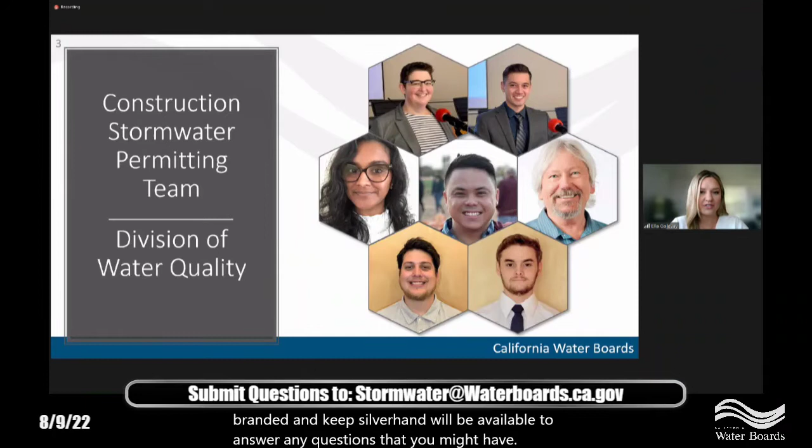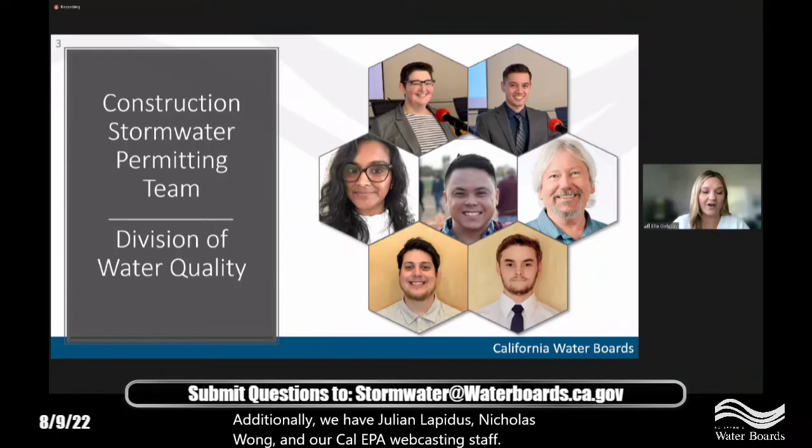As we begin this public workshop, I'd like to introduce our program staff. We have Brandon Roosenboom, who will be presenting information on staff's response to comments and providing an overview of proposed changes in the permit. Following the staff presentation, Brandon and Cabe Silverhain will be available to answer any questions you might have. Behind the scenes, we have Salvador Chaparro and Pushpa Zachariah, running the technical support end and managing Zoom. We have Reed Hashofsky, monitoring the Zoom chat and email for questions. We also have Matthew Shimizu, taking notes and providing support. All of these folks and more have been working diligently on writing the permit, doing necessary technical research, managing and visualizing data, and responding to public comments. Additionally, we have Julian Lapidus, Nicholas Wong, and our Cal EPA webcasting staff who will be assisting with technical functions.

The State Water Board's mission is to preserve, enhance, and restore California's water resources for the benefit of present and future generations, which is why we want to begin this meeting by acknowledging groups who have and who continue to experience economic, environmental, and social disadvantages as a result of historical marginalization and whose daily lives are impacted by racism and injustices. As a reminder, our work here today should strengthen the empowerment of community voices as we collaborate to provide clean, safe, and affordable water to all Californians.

During today's workshop, we will explain the continuing public process for the notice released on July 22nd, 2022. We'll provide a high-level overview of the proposed permit content and identify specific items that changed in response to comment and those that are subject to a limited scope public comment period. We'll answer questions and provide clarification to assist interested parties in understanding the permit requirements.

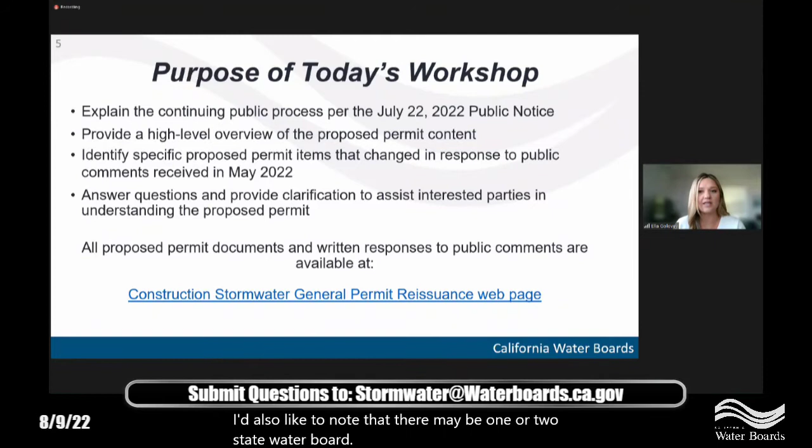Proposed permit documents can be found on our program's webpage. I'd also like to note that there may be one or two State Water Board members in attendance during today's meeting, but there will be no action taken, and this is not a board hearing. This workshop is being webcast and recorded, and it will be posted on the Construction Stormwater General Permit Reissuance webpage, along with the PowerPoint presentation.

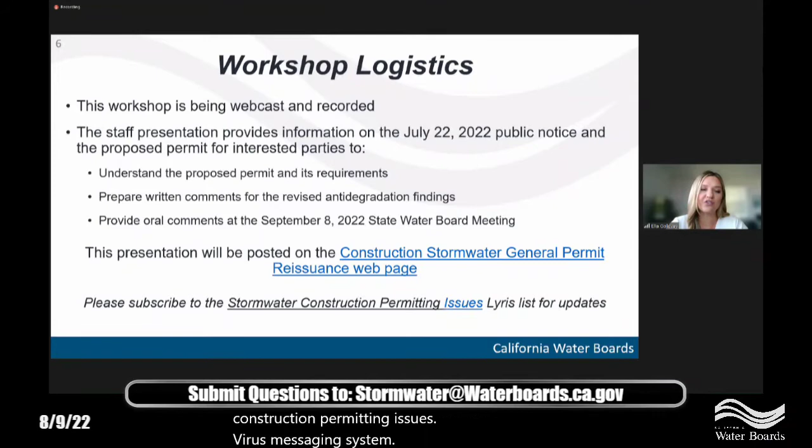Today's presentation will provide information on the July 22nd, 2022 public notice and the proposed permit. This information will help interested parties to better understand the proposed permit and its requirements, prepare written comments for the revised anti-degradation findings, which we will define a little bit later in this presentation, and provide oral comments at the September 8th, 2022 State Water Board meeting. I'd also like to encourage you to subscribe to our Stormwater Construction Permitting Issues Lyris messaging system to receive future notifications and updates regarding the construction general permit.

Following the presentations, we'll take a quick 10-minute break before continuing on to our questions and answers. The workshop will continue until there are no further questions, or about 5 minutes before noon, for some closing remarks. And Ella, I did want to add just a little bit of correction there.

Hopefully this will provide you a good background on the proposed permit requirements and get you all ready for the board hearing in September. So today's workshop will provide an overview of the permit reissuance process, the additional limited scope comment period for the anti-degradation findings, the response to the May 2022 limited scope comments, and a general review of proposed permit requirements.

So first up, permitting background and process. We'll begin this presentation with some construction stormwater permitting context. The Federal Clean Water Act prohibits certain discharges of stormwater to waters of the United States, except for those with a National Pollutant Discharge Elimination System, or NPDES, permit.

The Construction Stormwater General Permit is a specific NPDES permit that regulates discharges of runoff generated by precipitation over a construction site or other areas of active land disturbance. The State Water Resources Control Board adopted the existing NPDES Construction Stormwater General Permit in 2009 to regulate stormwater discharges associated with construction activities that disturb 1 or more acres of land.

The 2009 Construction General Permit expired in September of 2014 and has been administratively extended until the effective date of a reissued Construction Stormwater General Permit. The proposed permit serves to implement regulatory requirements such as federal effluent limitation guidelines, statewide policies, and total maximum daily loads that became effective since the adoption of the 2009 permit.

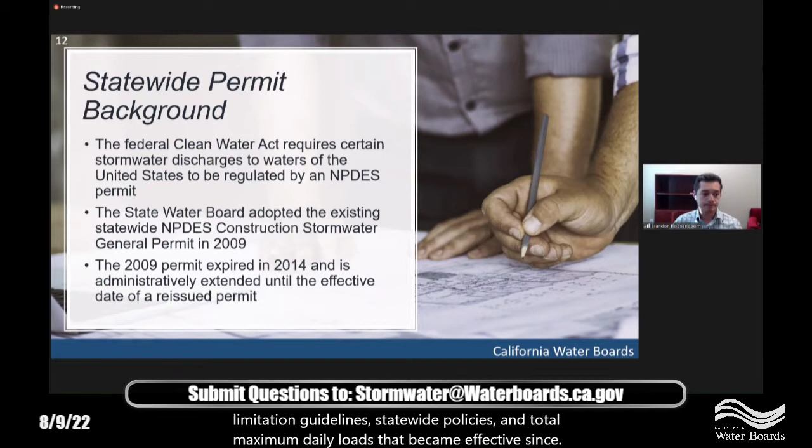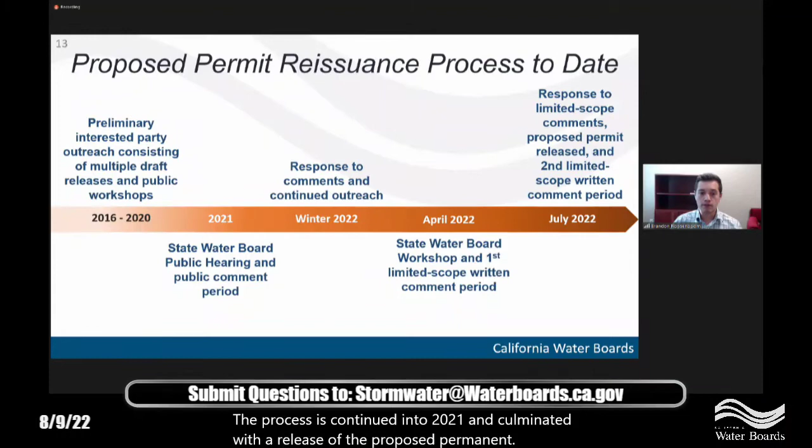This permit reissuance has been in the works for quite some time, since before my time with the water boards, in fact starting in 2016, where staff have been engaging with interested parties and releasing multiple drafts throughout this time period to refine the requirements of the proposed permit. The process has continued into 2021 and culminated with a release of the proposed permit reissuance in July of 2022 for the consideration of its adoption in September.

Looking forward, we have several key dates to be aware of. Written comments for the second limited scope public comment period will be accepted until noon of August 23rd, 2022. For those looking to submit a PowerPoint presentation for the board's adoption meeting, those will be due at noon on September 1st, 2022. And of course, the board meeting to consider adoption of the proposed permit is September 8th, 2022.

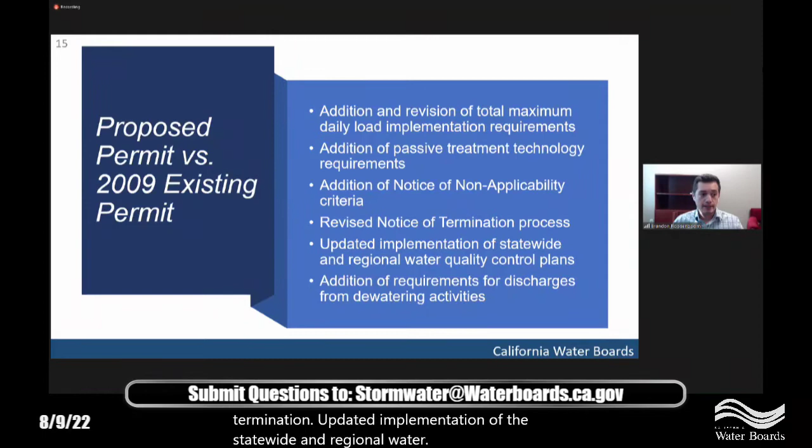So, what are the primary differences between the proposed permit and the 2009 existing permit? Well, those include the addition and revision of total maximum daily load implementation requirements, the addition of passive treatment technology requirements, the addition of notice of non-applicability criteria, a revised process for the notice of termination, updated implementation of the statewide and regional water quality control plans, and the addition of requirements for discharges from dewatering activities.

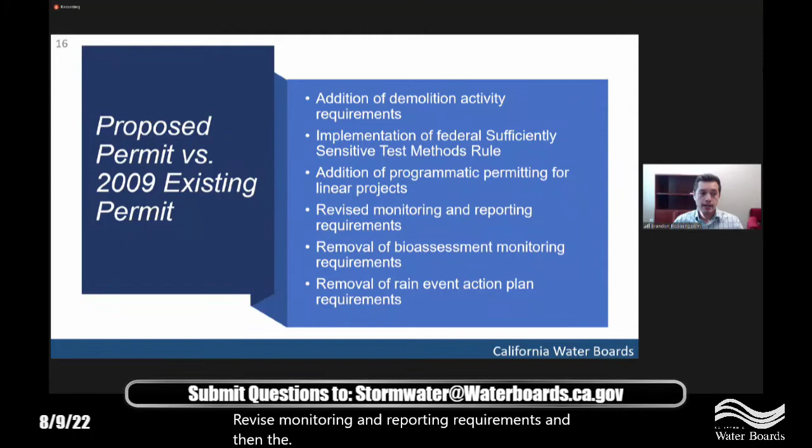Continuing on, other differences include the addition of some demolition activity requirements, the implementation of the federal sufficiently sensitive test methods rule, addition of programmatic permitting for linear projects, revised monitoring and reporting requirements, and then the removal of bioassessment monitoring and rain event action plans.

So next we'll be discussing the item that the additional limited scope comment period focused on, the revised anti-degradation findings. During the first limited scope comment period, the State Water Board received comments on the proposed anti-degradation findings in the March 2022 draft of the permit reissuance. The revised anti-degradation findings are set forth in section IH2 of the fact sheet.

Consistent with the anti-degradation provisions of 40 Code of Federal Regulations 131.12 and State Water Board Resolution 68-16, the fact sheet includes findings for water bodies that do not meet water quality objectives and water bodies that exceed water quality objectives, which the findings refer to as high quality water bodies. The fact sheet explains that no anti-degradation findings are required for water bodies that meet but do not exceed the water quality objective for a particular pollutant.

As the fact sheet explains, for ease of analysis, the findings use 1968 as the baseline water quality. Because the permit enrollment is available statewide, the State Water Board assumes that there will be discharges to both high quality waters and non-high quality waters.

For water bodies that do not meet water quality objectives, the permit is consistent with the anti-degradation policies because the permit will ensure that existing uses are maintained and protected. Discharges authorized by this permit would not cause further degradation, nor would they interfere with the improvement of water quality of such waters.

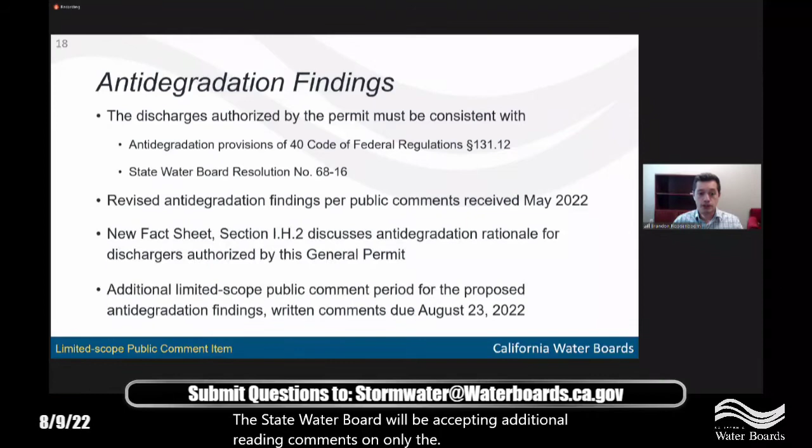For high quality waters, the findings apply decision-making criteria set forth in the anti-degradation policies. The fact sheet was revised to include additional detail and provide some extra evidence supporting the State Water Board's analysis of regulatory alternatives. The State Water Board will be accepting additional written comments on only the revised anti-degradation findings, and those are due at noon on August 23rd, 2022.

In addition to the revised anti-degradation findings, staff prepared responses to comments on 3 other items from the May 2022 limited scope public comment period: the regulatory transition period, the retranslation of nitrogen-based numeric effluent limitations, and the TMDL related soil screening investigation and its associated total suspended solids numeric effluent limitation. We will start by discussing the proposed permit effective date and the associated regulatory transition period, but save the TMDL related limited scope comments for the TMDL implementation requirements section of the presentation.

So, proposed effective date. Staff is proposing an effective date of September 1st, 2023 for the construction stormwater general permit reissuance. This is roughly a year after the scheduled board meeting to consider adoption of the permit. This date was selected to allow ample time for State Water Board staff to enhance SMARTS to accommodate electronic submittals, and provide the regulated community and stormwater professionals with roughly a year to prepare for new permit requirements, if the anticipated reissuance timeline holds.

Additionally, the regulated community requested that the effective date be set during the drier period of year. And although we've been getting a little bit of rain this summer, September is generally still a drier part of a California year.

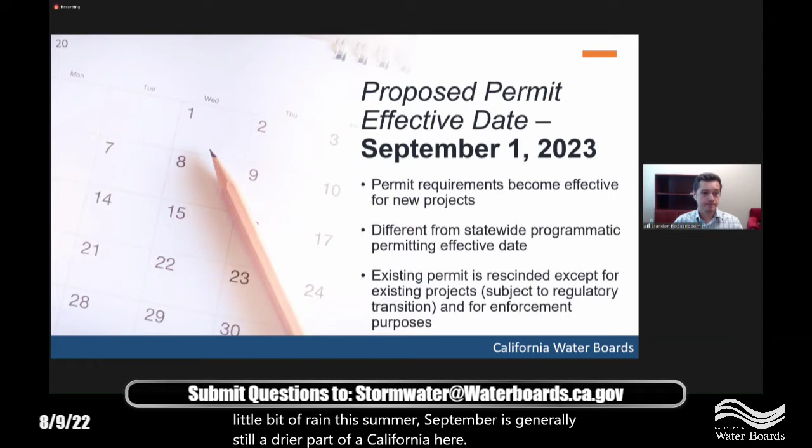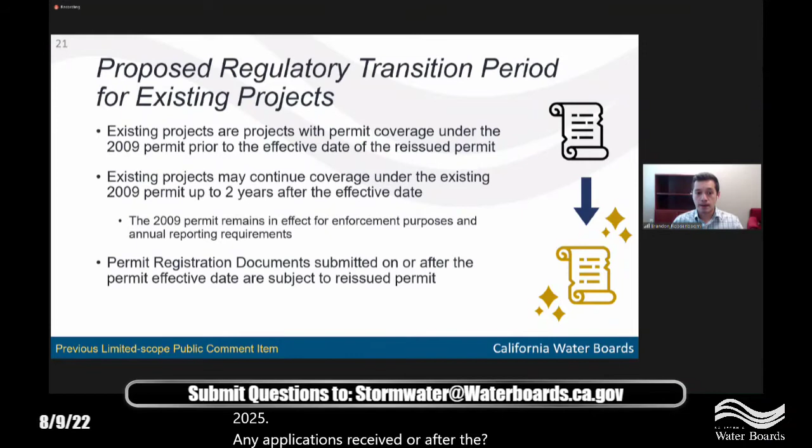The proposed permit released in July 2022 continues to offer existing dischargers a regulatory transition period, with one key difference from the previous draft: the transition period has been shortened from 3 years to 2 years after the effective date of the reissued permit. Thus, permittees that enroll under the 2009 general permit prior to the effective date of the permit may continue coverage under the 2009 permit until August 31st, 2025. Any applications received on or after the effective date of the reissued permit must comply with the reissued permit's requirements.

Okay, the next section is to provide a high-level overview of the major differences between the existing and proposed permits, starting with some of the more administrative changes.

The reissued permit allows dischargers to submit what's called a Notice of Non-Applicability, or NONA, when a construction site is not hydrologically connected to waters of the United States. This is demonstrated through a no discharge technical report, which must be prepared by a California licensed professional engineer or professional geologist with hydrological expertise. Regional Water Board staff may review the no discharge technical report and require that the discharger reassess NONA eligibility if it is determined that there are errors in the report, or if the site is indeed hydrologically connected to waters of the United States.

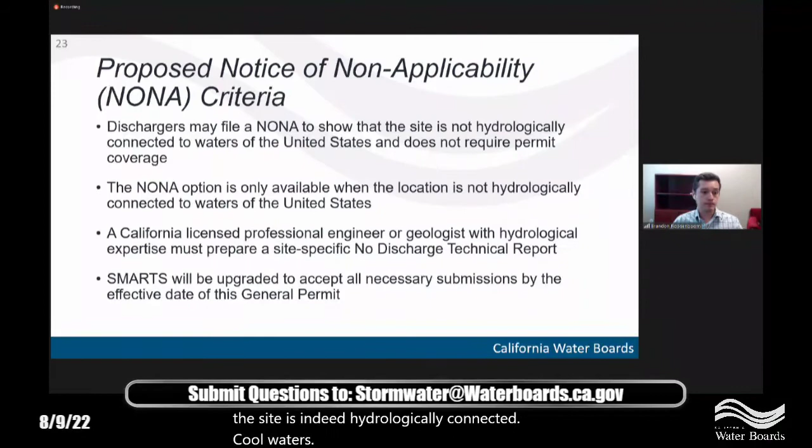Another administrative change is the proposal to include programmatic permitting for linear projects. Programmatic permitting allows linear underground and overhead project dischargers to submit a single notice of intent to obtain coverage for multiple non-contiguous linear underground overhead projects if they are located within one regional water board, consist of similar scope of activities, and have the same legally responsible person. Programmatic permitting can be used for all linear project types.

Staff added a provision in the July 2022 draft for dischargers deploying Executive Order N-73-20 to obtain statewide programmatic permit coverage within 100 days of the reissued permit's adoption date, to facilitate meeting the executive order's deadline to provide high-speed broadband internet access to California's rural communities. This only applies to broadband projects that are outside of a construction project otherwise regulated by this permit. The proposed effective date of the statewide programmatic permitting option would be December 17th, 2022, if the permit is adopted on September 8th, 2022.

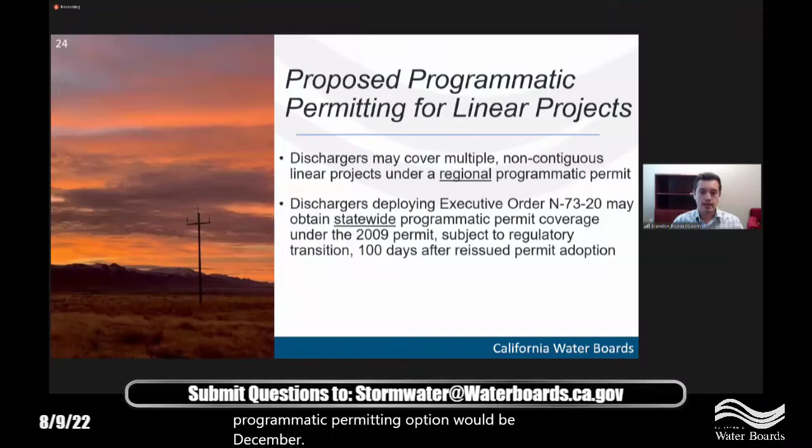The proposed permit incorporates a provision for dischargers, primarily large housing developers, to terminate residential lots that have unfinished yards and landscaping areas, in order to reduce the acreage. The dischargers must meet the following criteria: the residential lots have been sold to individual homeowners for residential use, and a certificate of occupancy or equivalent document is maintained on the site. The lot must be less than 1 acre of disturbance, and all construction activity conducted on the lot by the discharger has to be complete, and the discharger has to install temporary best management practices to stabilize the unfinished yards or landscaping areas.

The discharger shall upload as an attachment to SMARTS documentation of a contract, such as covenants, conditions, and restrictions, requiring that the individual homeowner stabilize the yard and landscaping within 1 year and maintain temporary best management practices until stabilization is achieved.

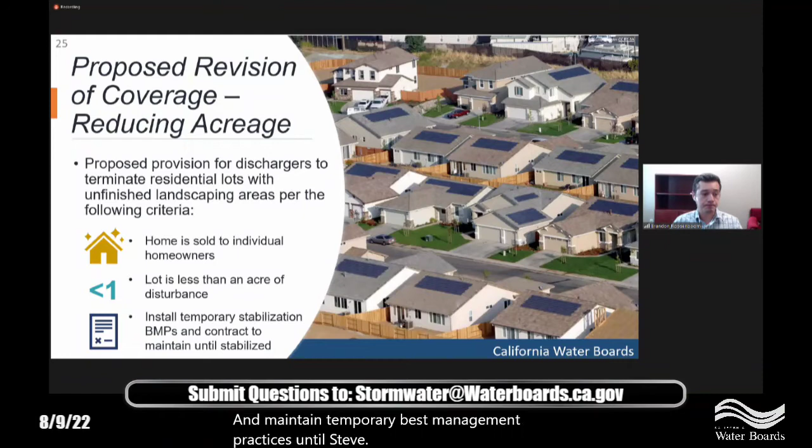The proposed permit also allows a discharger to reduce monitoring when all construction activities are suspended at the project and the site is temporarily stabilized or buttoned up. The discharger is required to revise the stormwater pollution prevention plan in SMARTS through a change of information and must provide a revised site map as well as photo documentation of the temporary stabilization.

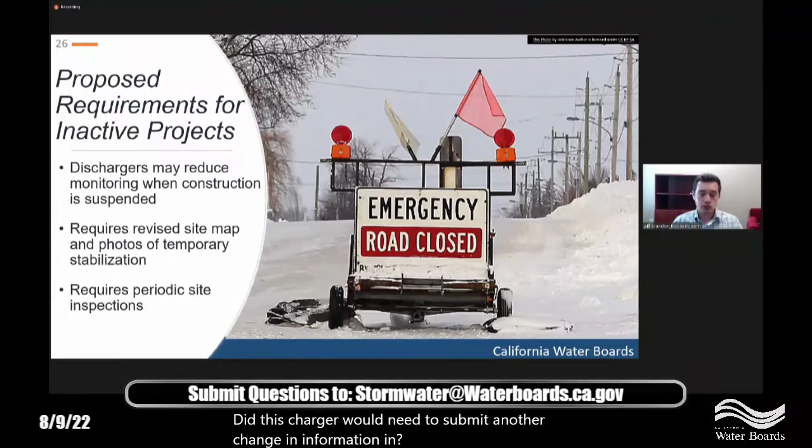That said, this still requires periodic inspections. Once by the qualified stormwater pollution prevention plan practitioner within 14 days of the approved change of information to switch to an inactive status, and then once monthly and also prior to qualifying precipitation events, and those can be done by either the qualified SWPPP practitioner or their delegate. The discharger would need to submit another change of information and updated SWPPP in order to resume construction activities.

The proposed permit reissuance notice of termination process has a few additional requirements compared to the 2009 permit. The notice of termination process now requires that the qualified SWPPP practitioner conduct a final inspection to ensure that the permanent best management practices are functioning as intended, and that the site meets final stabilization conditions. The discharger is now required to submit photos and a final site map with the notice of termination as well. And as with the previous permit, a brief long-term maintenance plan is required to show that the post-construction best management practices and any low-impact development will be maintained to continue functioning as intended to protect water quality.

This additional information, if prepared properly, should facilitate the regional water board staff's effort to approve or return notices of termination within a timely manner. And as we've heard from dischargers over the implementation of the existing permit, this process can take long.

The proposed permit reissuance also includes a provision that automatically approves notices of termination if the regional water board does not take any action on that notice of termination within 30 days. And those actions could be accepting the notice of termination for review, denying the notice of termination, or returning the notice of termination with some comments.

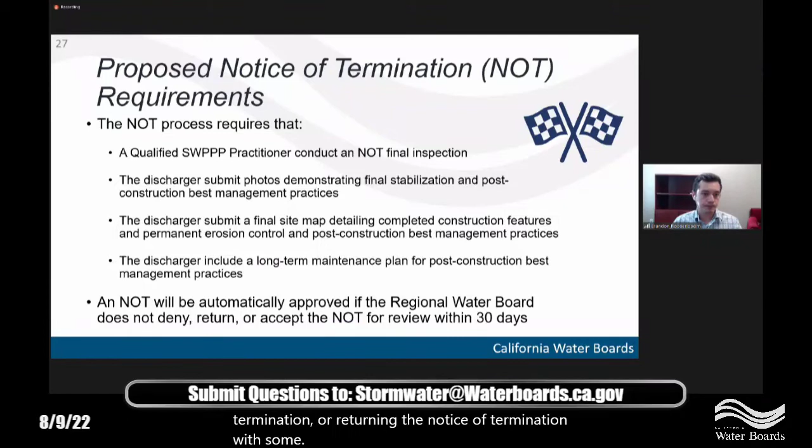All right. Getting away from those more administrative changes, we'll be going into some of the monitoring and reporting requirements.

The proposed permit identifies clear roles and responsibilities for qualified stormwater pollution prevention plan developers and practitioners, otherwise known as QSDs and QSPs. One of the objectives of the reissued permit is to require that a QSD spend a little more time observing site conditions each year, as well as increase communication with their qualified SWPPP practitioners when there is an issue with the discharger's water quality.

Additionally, throughout the implementation of the existing 2009 permit, many stormwater professionals, regulators, and members of the regulated community have witnessed poor performing QSDs and QSPs. The proposed permit now allows the water boards to suspend or rescind QSD, QSP certifications as an enforcement action should we receive a complaint about a particular QSD or QSP's work.

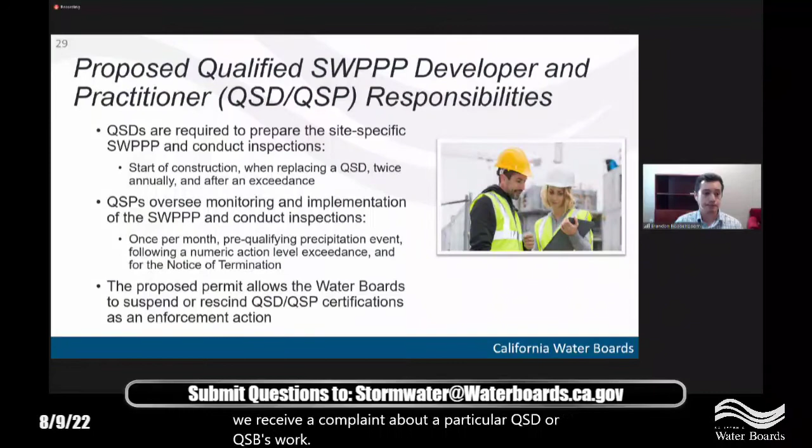Qualified SWPPP developers and practitioners certified through CASQA must take 6 hours of continuing education annually to remain in good standing with their certification. Staff agreed that continuing education is important, especially considering how best management practices are constantly evolving in the industry.

In order to broaden the number of pathways for aspiring QSDs and QSPs to obtain their certification, any individual may recommend a course for the Deputy Director of the Division of Water Quality to consider as a prerequisite for the Qualified SWPPP Developer and Qualified SWPPP Practitioner roles. State Water Board staff and the Construction General Permit Training Team will review those recommendations and advise the Deputy Director's decision whether or not to consider one of those as a prerequisite course.

Qualified SWPPP practitioners opting to delegate responsibilities to other individuals are required to provide training to those individuals based on the guidelines that the Construction General Permit Training Team prepared. The proposed permit includes foundational training courses such as roles and responsibilities of stormwater professionals, forecasting information, and reporting, as well as site-specific training for visual inspection, sampling procedures, and the implementation of the stormwater pollution prevention plan and best management practices relevant to that delegate's assigned responsibilities. Staff find that this requirement is necessary to ensure that delegates are properly implementing stormwater management practices in order to comply with the permit.

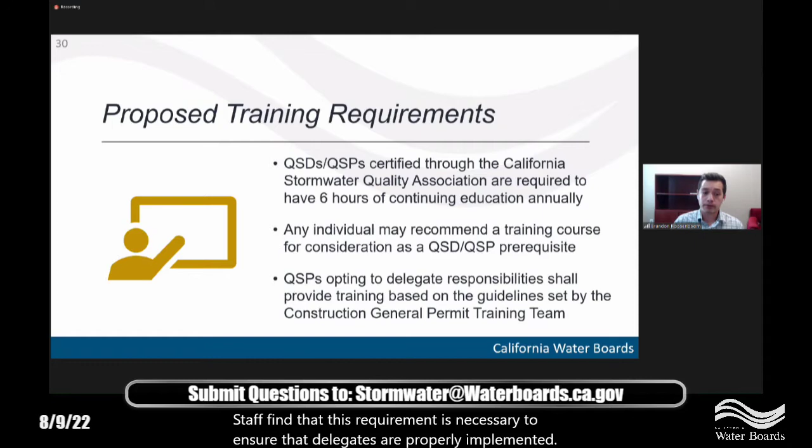The proposed permit switches from precipitation accumulations to precipitation forecasts, giving dischargers more time to plan for their monitoring activities. Advancements in forecasting capabilities since 2009 have supported this change. A qualifying precipitation event is now initiated by a forecasted precipitation event of half an inch or more precipitation in a 24-hour period. The qualifying precipitation event continues for each subsequent 24-hour period with a quarter inch of forecasted precipitation or more, and it would end with two consecutive 24-hour periods with less than a quarter inch forecasted.

The post-qualifying precipitation event inspection may be done on either the day where there is less than a quarter inch predicted, or 48 hours after the event ends.

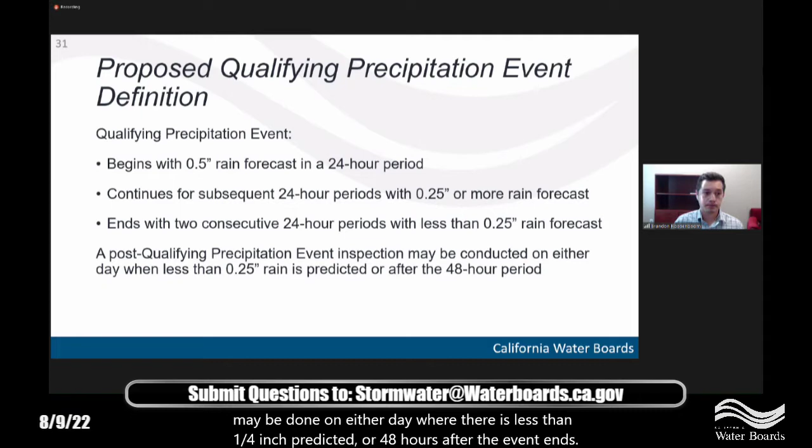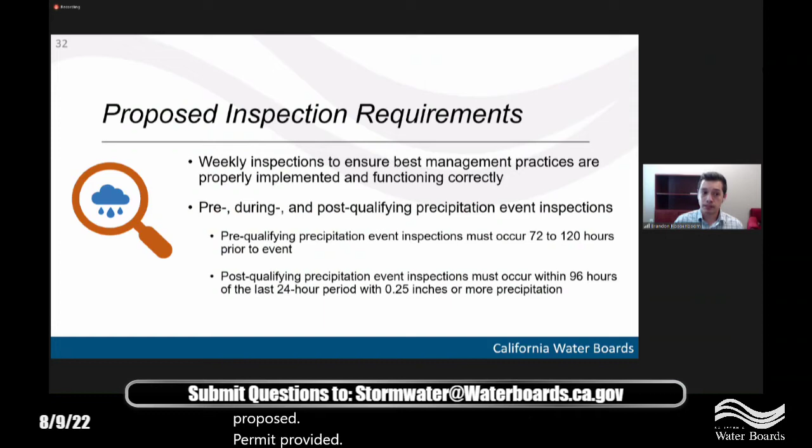All dischargers, regardless of their risk level or type, are required to conduct weekly visual inspections as a means to check up on best management practice implementation. As with the existing 2009 permit, dischargers are required to conduct pre, during, and post-qualifying precipitation event inspections. However, the proposed permit provides greater ranges and thus flexibility for when those inspections can occur.

This graphic summarizes the qualifying precipitation event inspection process. When the National Weather Service predicts an upcoming 24-hour period of half an inch or more precipitation, the inspector must complete a pre-qualifying precipitation event inspection anytime from 72 to 120 hours prior to the onset of the storm. Once the storm begins, an inspection is required during working hours within the initial 24-hour period of precipitation.

If the forecast was revised to less than half an inch before the event begins, an inspection must still be done if a quarter inch or more is forecasted. During qualifying precipitation event inspections are required for each subsequent 24-hour period when a quarter inch or more is forecasted, but not required during 24-hour intervals if less than a quarter inch is predicted.

The qualifying precipitation event ends when there are two consecutive 24-hour periods where there is less than a quarter inch forecasted. The post-qualifying precipitation event inspection may be done during either of those two periods, as I mentioned before, or within the subsequent 48-hour period.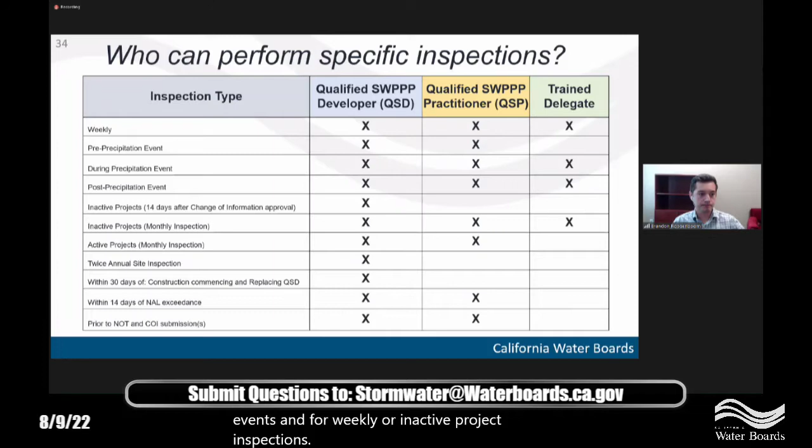Next, we will move on to more of the sample-based monitoring requirements. As a reminder, risk level 1 dischargers are not required to collect stormwater discharge samples, and that has not changed between the existing and proposed permits. That said, risk level 2 and 3 dischargers are still required to collect samples for comparison against the pH and turbidity numeric action levels established by the permit.

However, a key difference is that dischargers are now only required to collect one sample per discharge location per day of discharge, and the numeric action levels are assessed on a per discharge location basis rather than on a daily site average. Thus, staff expects dischargers to collect fewer samples overall, but they may be required to perform corrective actions for more specific site drainages.

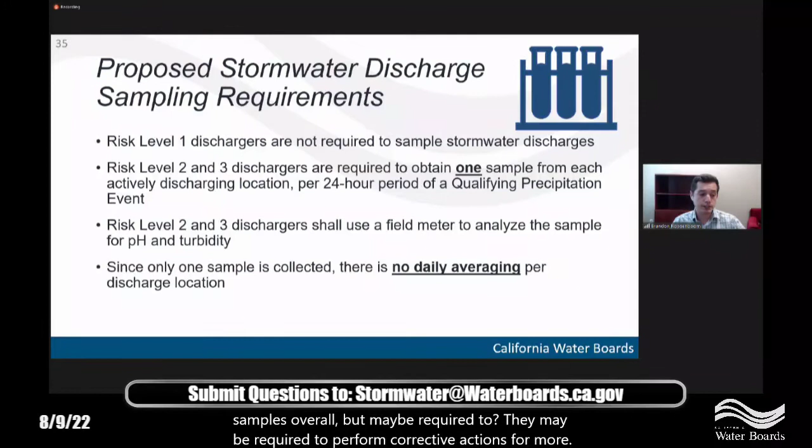This figure represents a 24-hour period divided into 4 6-hour quarters to demonstrate when qualifying precipitation event sampling could be done, and would be repeated each day where there is discharge during an extended qualifying precipitation event. I have gone over this before in previous workshops, and I think it's fairly self-explanatory, so we'll go ahead and save some time there by continuing on.

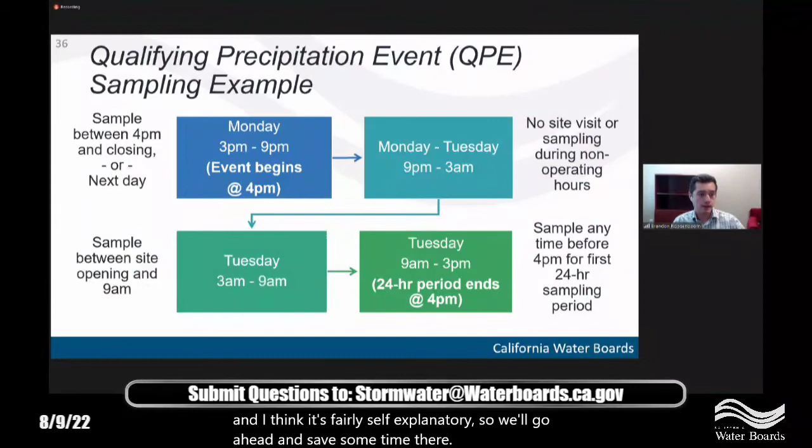One of the other key monitoring requirements that the proposed permit relies on is non-visible pollutant monitoring, which was also required by the existing 2009 permit. Non-visible pollutant monitoring is required when any discharge has the potential to discharge a pollutant that was identified or should have been identified in the project's pollutant source assessment due to one of the following reasons.

And that is a failure to implement best management practices, a container spill or leak, or a best management practice breach, failure, or malfunction. Dischargers are required to collect a non-visible pollutant sample every 24-hour period of discharge until necessary corrective actions are completed. And they do not have to sample if the pollutant is cleaned up or corrective actions are implemented prior to discharge.

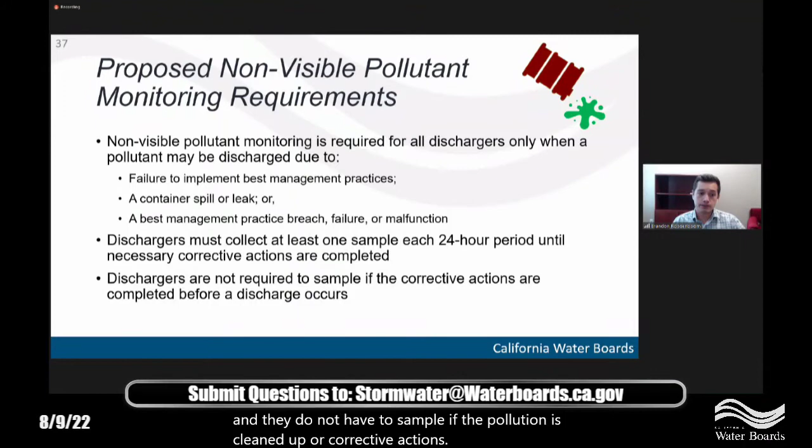The next section likely represents the most significant change between the existing 2009 permit and the proposed permit, and that would be the proposed total maximum daily load implementation requirements.

Total maximum daily loads are existing regulations that are incorporated into Regional Water Quality Control Board water quality control plans through separate public adoption processes. Total maximum daily loads address pollutants that cause impairments to water bodies by establishing a sum of allowable pollutant loading into a specific water body or watershed from all identified sources of that pollutant. Total maximum daily loads are not self-implementing and are implemented through the requirements adopted in NPDES permits or other board actions, such as the construction stormwater general permit.

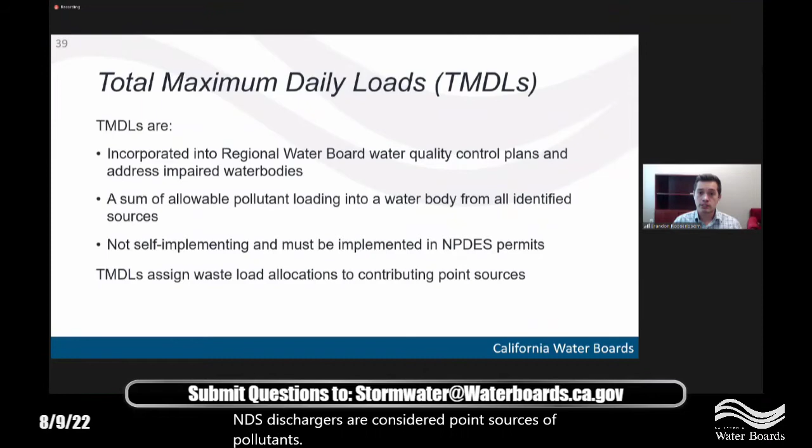NPDES dischargers are considered point sources of pollutants and are assigned what is called a waste load allocation to limit the discharge of pollutants.

Due to the variety of pollutants and waste load allocations assigned to address them, staff have developed multiple implementation strategies consistent with the assumptions and requirements of the total maximum daily loads. The intent was to streamline compliance by leveraging and modifying existing permit requirements where possible. Existing requirements in the 2009 permits, such as pollutant source assessments, source control best management practices, soil loss modeling via RUSLE2, and non-visible monitoring and other reporting are the basis for the total maximum daily load implementation requirements.

There are four main categories of total maximum daily load implementation requirements. The first is compliance with the general permit, where those requirements are already sufficient to comply with the total maximum daily load. All four categories must comply with the general permit requirements.

The second would be compliance with erosion and sediment controls in the permit, paired with the revised universal soil loss equation model, to demonstrate compliance with the mass-based waste allocations, which are typically assigned for sediment and sediment-associated pollutants.

Compliance with the total maximum daily load related numeric action levels is the third category, and that's to comply with concentration-based waste allocations assigned in the receiving waters. And lastly, compliance with total maximum daily load related numeric effluent limitations to comply with concentration-based waste allocations assigned at the point of discharge. However, as we will discuss in a few moments, some numeric effluent limitations were retranslated through the iterations of the proposed permit process.

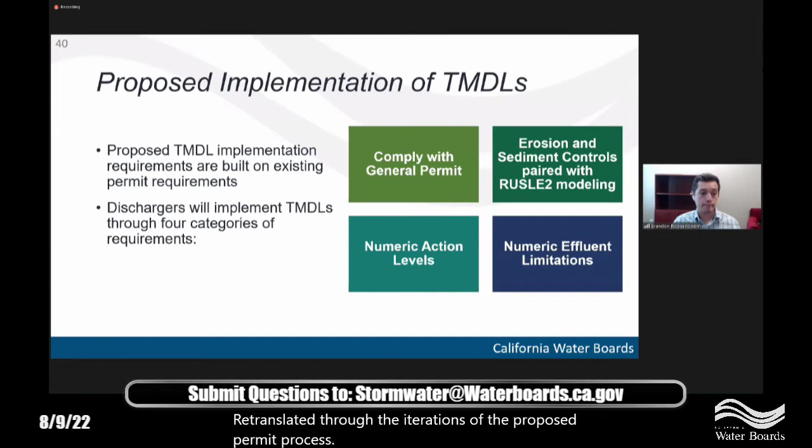So how will construction stormwater dischargers know which proposed total maximum daily load implementation requirements apply to them? Well, there are three main steps. Step one would be to determine responsible discharger status.

Does this project discharge into a total maximum daily load watershed or water body? Is the main question to answer here. The State Water Resource Control Board plans on providing a map tool to guide dischargers similar to the existing guidance for the industrial stormwater general permit, which is shown to the right. However, it is the discharger's responsibility to verify if the project's discharges actually go to a TMDL watershed or water body. The second step would be to perform a site-specific pollutant source assessment.

Does this site have sources of the total maximum daily load listed pollutants? And is there potential for those pollutants to be present in stormwater discharges? If not, the total maximum daily load implementation requirements are not applicable to the discharge. Lastly, the discharger would refer to the proposed attachment H for any of the applicable total maximum daily load implementation requirements to determine which ones they must comply with.

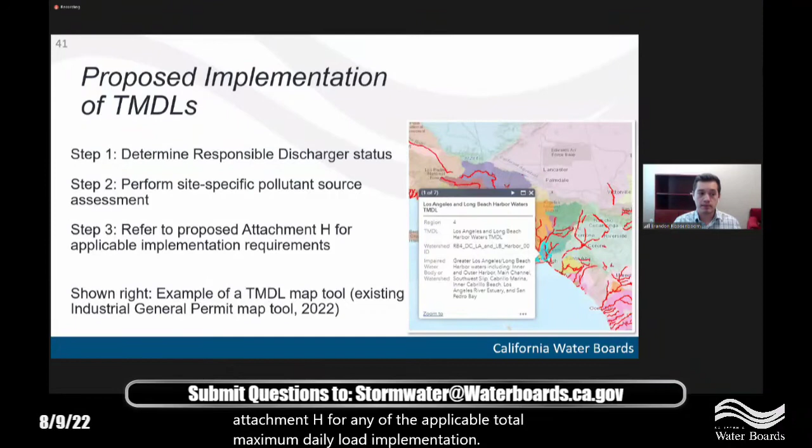In the event that the discharger has to comply with a total maximum daily load related numeric action level or numeric effluent limitation, the discharger would assess their discharges through non-visible pollutant monitoring. All three of the following conditions need to be met in order to trigger total maximum daily load sampling. If any condition is not met, then sampling is not required by the discharger.

First, the construction project must discharge to a TMDL listed watershed or water body. Second, the pollutant source assessment must identify a TMDL specific pollutant with a waste load allocation translated into either a numeric action level or numeric effluent limitation, and that has to have the potential to discharge into the listed TMDL watershed or water body. And then third, non-visible pollutant sampling must be triggered.

Non-visible pollutant sampling is triggered when there is a failure to implement best management practices, there is a container spill or leak, or there's a best management practice that has been breached, failed, or is malfunctioning. If the spill, leak, or breach is not fixed and cleaned and best management practices are not implemented prior to discharge, then non-visible pollutant sampling will be required. However, if the spill, leak, or breach is immediately cleaned and best management practices to control the pollutants are implemented prior to discharge, then non-visible pollutant sampling is not required.

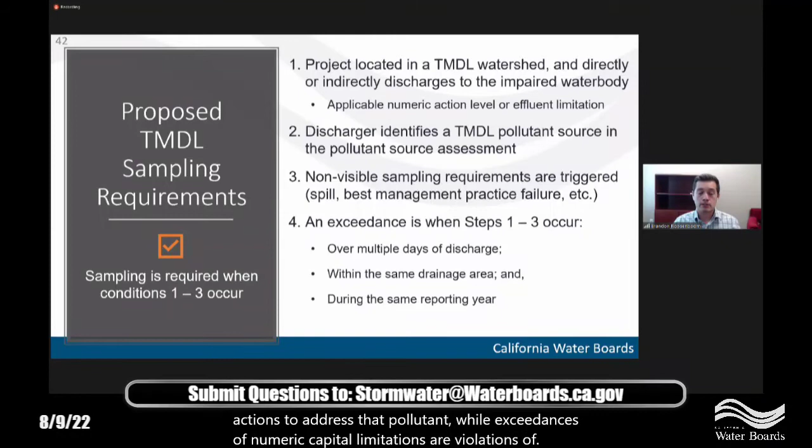Now that we've covered the basics of the proposed total maximum daily load implementation requirements, we can move on to our discussion regarding the May 2022 limited scope TMDL related items.

The first of these two limited public scope comment items is the retranslation of nitrogen-based nutrients from numeric effluent limitations into numeric action levels. Throughout the reissuance process, staff has heard on multiple occasions that numeric effluent limitations, especially for nitrogen-based nutrients, are infeasible to comply with using standard construction best management practices. On the other hand, staff has also heard support for the numeric effluent limitations, as commenters claimed that this is how the total maximum daily loads were intended to be interpreted and implemented through NPDES permits.

The proposed permit maintains the retranslation into numeric action levels, as staff has revised the fact sheet to further explain how numeric action levels are actually consistent with the assumptions and requirements of the total maximum daily load waste allocations, and they are expected to be protective of water quality. Additionally, available data from industrial stormwater dischargers supports the expectation that most construction stormwater dischargers will be able to comply with the numeric action levels.

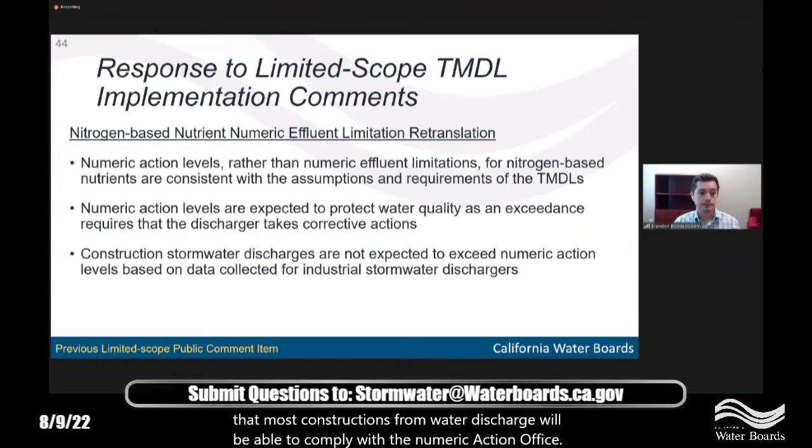The second TMDL-related limited scope public comment item was the proposal of a TMDL-related soil screening investigation and associated total suspended solids numeric effluent limitation for very specific waste allocations that address metals, organochlorine pesticides, and PCBs. These proposed TMDL implementation requirements would only apply to dischargers discharging into a water body or watershed addressed by the Los Angeles Area Lakes TMDL and the Los Angeles and Long Beach Harbor Waters TMDL. The discharger would conduct a soil screening investigation across the site to collect random samples according to a procedure outlined in the permit and analyze them for the applicable total maximum daily load pollutant.

If the results do not indicate that metals are present at concentrations above their waste allocations, or that organochlorine pesticides and PCBs are present at concentrations above the reporting limit of the method used to analyze the soil, then the discharger is not required to comply with total maximum daily load implementation requirements. If the pollutants are found to be present, the discharger is required to comply with a numeric effluent limitation for total suspended solids set at 100 milligrams per liter. This numeric effluent limitation would be assessed at the same frequency as other TMDL-related numeric action levels or effluent limitations, through the non-visible pollutant monitoring we just discussed.

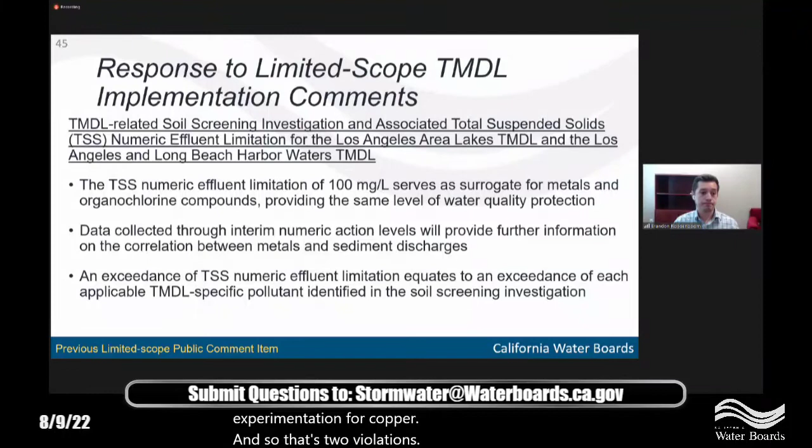Okay, and then we'll briefly discuss some other proposed requirements to save on time. The proposed permit also includes requirements for surface water buffers, essentially requiring that dischargers provide a 50-foot buffer where feasible. But dischargers also have the option of implementing best management practices that provide equivalent protection to a 50-foot buffer, which would be demonstrated using soil loss modeling.

There are also some proposed requirements for active treatment systems. Under the proposed permit, dischargers are allowed to bypass active treatment systems if their discharge complies with the discharge prohibitions and numeric action levels of the permit. Additionally, the proposed permit reestablishes the 10-year, 24-hour compliance precipitation event following comments received during the April board workshop. This compliance precipitation event provides dischargers with an exemption to the technology-based active treatment numeric effluent limitations.

The proposed permit also contains proposed requirements for passive treatment technologies, which limit the types of treatment products that can be used in passive applications applied to water. These are based on toxicity and require that the discharger hire a trained individual to calculate appropriate application rates for their specific site conditions.

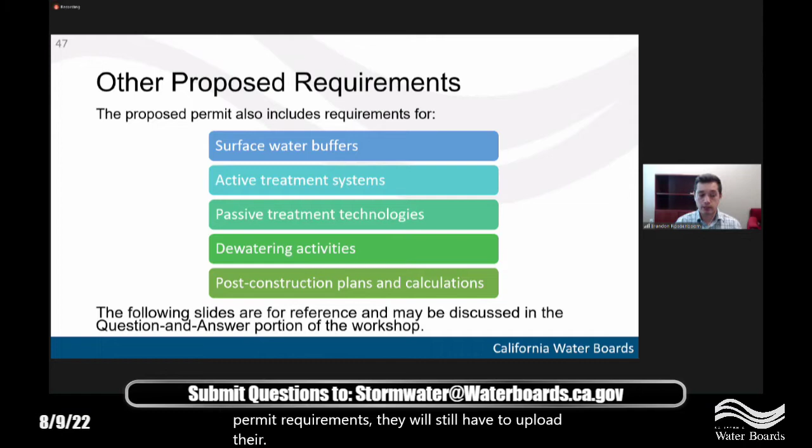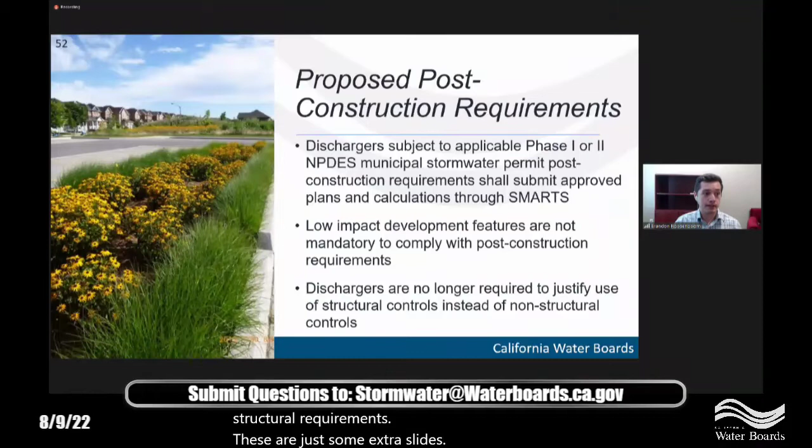These are just some extra slides to provide for reference when you post online. All right, so that concludes the staff high-level overview of the proposed permit requirements.

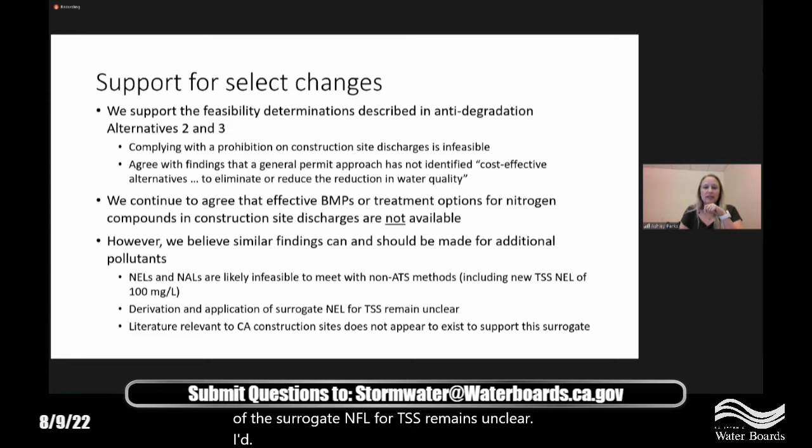However, we believe that similar findings can and should be made for additional pollutants. We believe that NELs and NALs are likely infeasible to meet with non-ATS methods, including the new TSS NEL of 100 milligrams per liter. We also feel that the derivation and application of the surrogate NEL for TSS remains unclear. The literature we've reviewed, we've not found relevant literature for California-based construction sites to support this TSS surrogate.

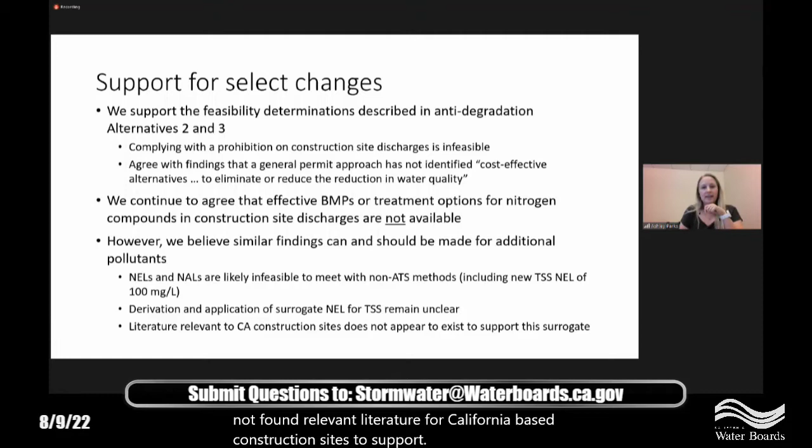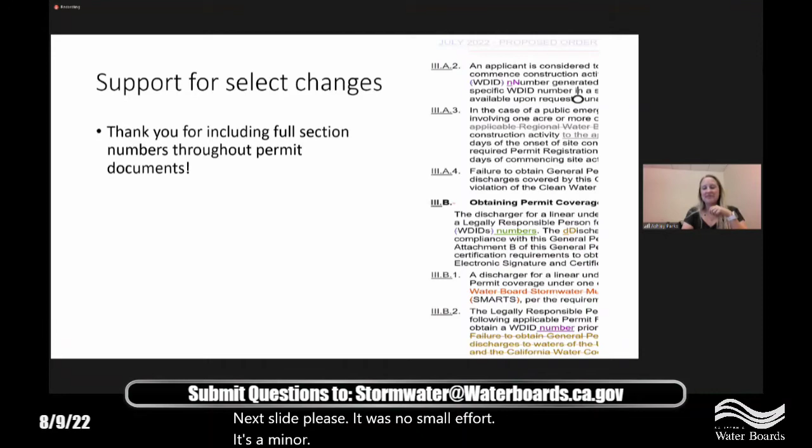Next slide, please. Another change that we're very grateful for you making is adding full section numbers throughout all of the permit documents. It makes it really easy to follow along. So again, it's a small change, but very much appreciated. Next slide, please. It was no small effort. Yeah, right, it's a minor change, big effort, and a lot of appreciation on our part. So thank you.

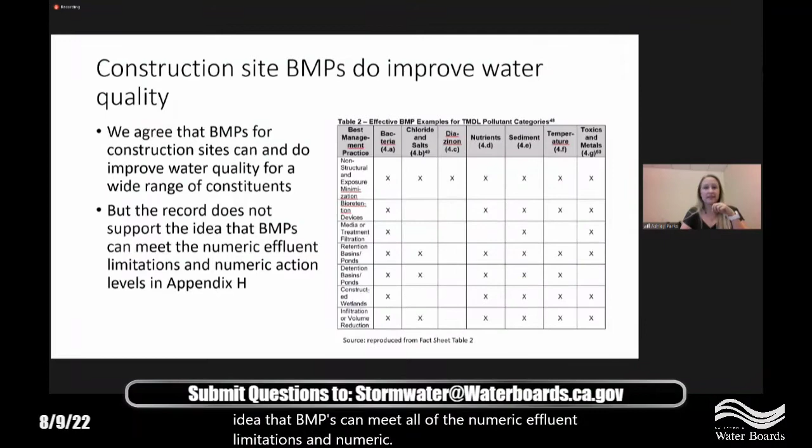Okay, and we also agree that the construction site BMPs do improve water quality for several different constituents, so this is your Table 2. But we feel that the record does not support the idea that BMPs can meet all of the numeric effluent limitations and numeric action levels provided in Appendix H for construction sites. Next slide, please.

So following along with that, we feel that there's more data that's needed to evaluate the ability of construction site BMPs and discharges to comply with the NELs and NALs in this permit. We've looked at data from the International BMP Database and various scientific literature, and that indicates that the numeric effluent limits for sediment can likely only be met using advanced treatment systems, not many of the BMPs that construction sites currently use. We don't feel that there's data that exists that completely evaluates the ability of construction BMPs to remove constituents, especially other than sediment.

Specifically dissolved constituents, as mentioned in the Appendix H table, the dissolved metals in Chollas Creek. So we don't feel that there's enough evidence supporting that BMPs can remove these dissolved constituents. And we also believe that typical construction site BMPs are unlikely to consistently meet the new surrogate NEL for TSS of 100 milligrams per liter. Next slide, please.

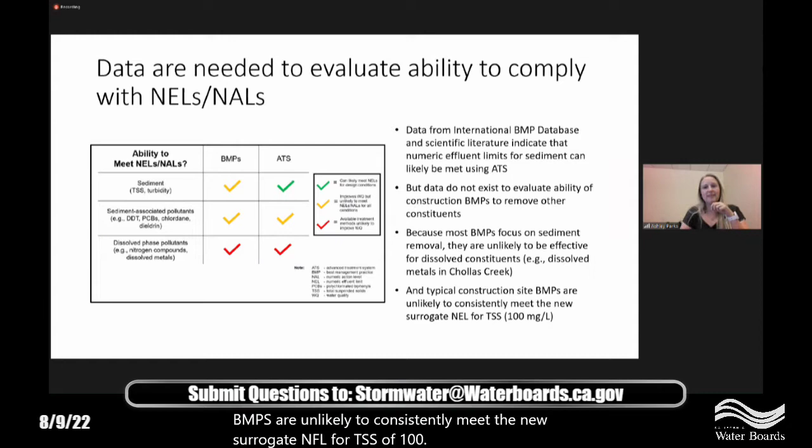And so more on that, we still feel it's a bit unclear on how to apply the TSS as a surrogate NEL, specifically in doing the soil screening, looking at soil concentrations of the different constituents, which are typically measured in units of milligrams per kilogram, and how that really translates to the TMDL specific thresholds that are typically in milligrams per liter. So when you have different units, it's really difficult to make that comparison. We'd appreciate a bit more clarity on how those levels relate to each other. Next slide, please.

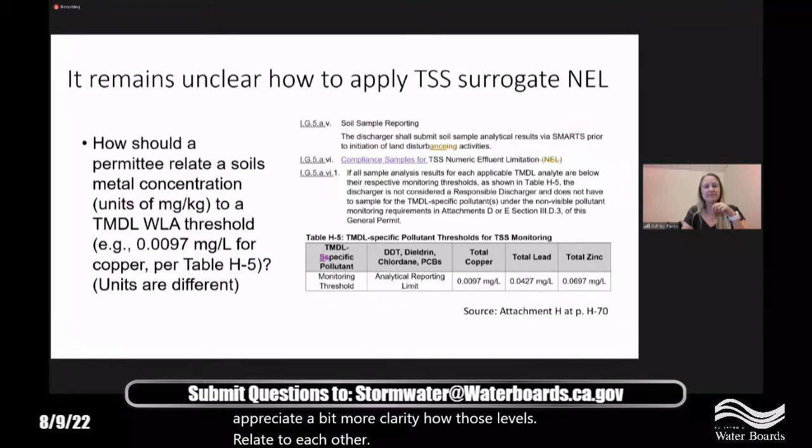We also believe, as mentioned previously, that complying with the TSS surrogate limit is likely infeasible without advanced treatment systems. We'd really appreciate more information on which construction site BMPs you believe can consistently achieve the TSS limit of 100 milligrams per liter, and what the basis of that conclusion is, or if you feel it will require ATS. I believe it was table 4 in the fact sheet that showed background TSS concentrations in different receiving waters, many of which were much higher than the 100 milligrams per liter limit.

And in assessing the ability to comply, what is the basis for relating the NTUs or the turbidity measurements to the proposed TSS limit of 100 milligrams per liter? I believe that was one of our previous comments as well, and we'd appreciate some more clarity on that link between those two measures.

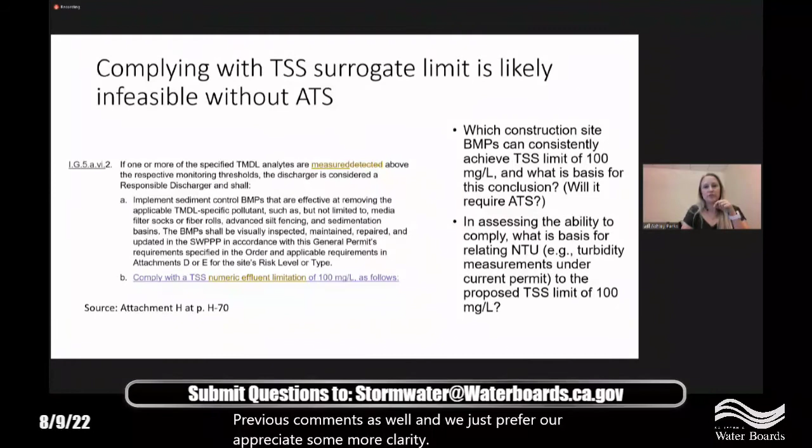Next slide, please. I believe you addressed this in your comment, but just wanted to further confirm that if you do have a TSS exceedance, but in your soil screening you'd mentioned copper and lead being measured, that would in fact be two violations or two exceedances. I think that is correct, yes, you addressed that.

Next slide, please. Overall, our requests are that the NELs should be converted to NALs or monitoring only. We feel it's infeasible to comply with NEL values for nitrogen compounds using typical construction site BMPs, and we feel it will also be infeasible to comply with the NELs for additional pollutants. We'd really appreciate more data to be collected to support the next iteration of this permit.

We also request to meet with staff to obtain additional clarification regarding the surrogate numeric effluent limitation for TSS, and we may have additional comments related to this. So, thank you for your time. I believe we have a meeting scheduled for later this week, so hopefully that can address your questions. Thank you so much.

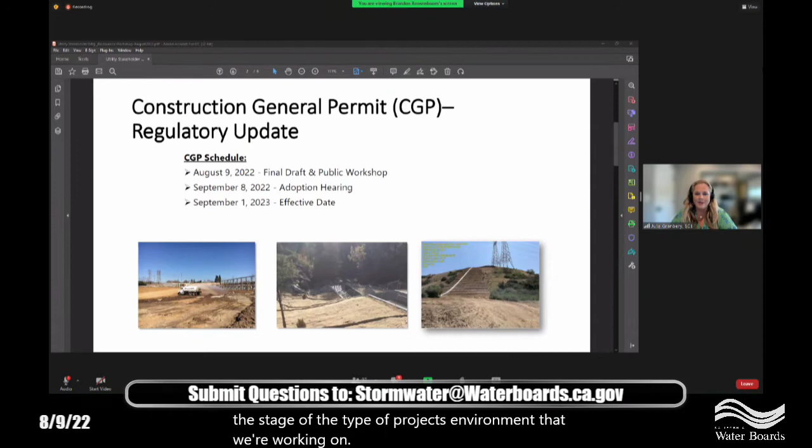I think we just have a handful of things we wanted to go over today. Similar to the building industry that just spoke, we really do appreciate some of the improvements we've seen working with you. The NOT approvals are huge when we're able to close out projects in a timely fashion. With the volume of work we have, not having to continue weekly inspections for over 100 projects really adds up.

Really appreciate that. The safety exemptions are also very important to the type and nature of work we do, eliminating administrative items like a rain event action plan that really didn't add any value. Being clear that sampling is required only when we actually have a discharge from the site is also very helpful. Using the precipitation forecast to trigger pre-storm inspections is also good. And for inactive sites, where a stabilized area doesn't have much going on for a period of time, it helps not to have to continue with those inspections.

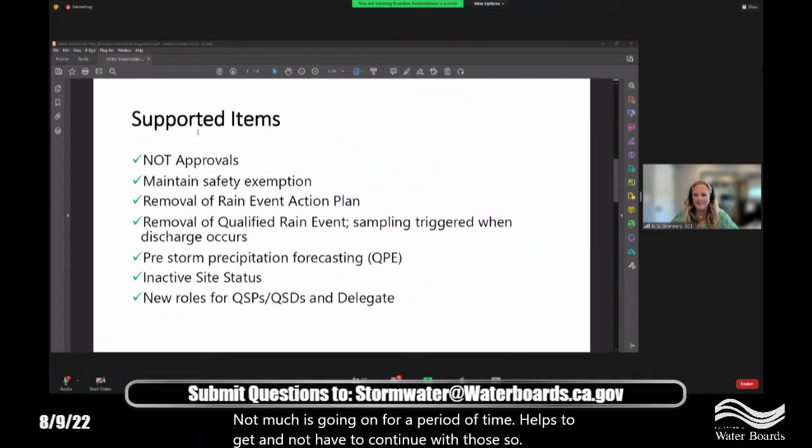We wanted to cover here the areas of more concern. The previous speaker covered well the TMDL and numeric effluent limit item, which I think has come up as the biggest item for most permittees here. It's that correlation with TSS and some of these constituents, and the ability to actually put BMPs out on construction site projects and control those. I think that's been covered really well.

With the numeric action levels, it's more of a way for us to protect water quality, make changes, and adjust to the nature of construction field projects we deal with. So again, we'd just reiterate the need for more work or discussions on these TMDLs and NELs.

The next point here is on programmatic permitting, and this may just be posing a question. It sounds like we can use this tool, which is great when we have similar scopes of work occurring, like these big long linear projects for us. So it's a positive tool, but I'm curious if there are enhancements needed to SMARTS, or any training or templates for this new tool in our toolbox, and whether those will be ready within that 100-day window.

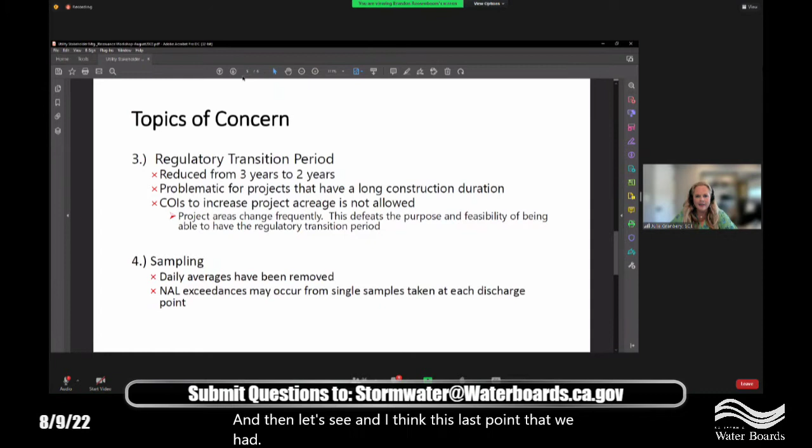And then let's see, I think this last point, number 4 - you can go to the next slide and then come back and speak. They're somewhat related here. I mentioned in the opening, positive for triggers for the pre-storm forecast, so that's good. That gives us a solid pre-storm mobilization go.

But for the post-storm, I think some of our inspectors may have a better way of describing this, but often when you have these long linear projects with multiple remote spans, the actual precipitation is very different from what was forecast. So sometimes sending someone to physically go see if there's something that triggers the inspection, and the rain gauge, may be a lot more than needs to be. I think we can talk through some of those examples, but actually Brandon, you covered it in some of your examples in your presentation, so this may not be as big of a deal.

So I think these were the main things we wanted to point out today. I don't know if there were any comments from staff, or if we wanted to schedule separate time, or if anybody else on the call had additional comments. But again, thank you for the time - we appreciate the collaboration with you guys. And if any of my colleagues from the utilities have comments they'd like to add, feel free. But thank you. Thank you.